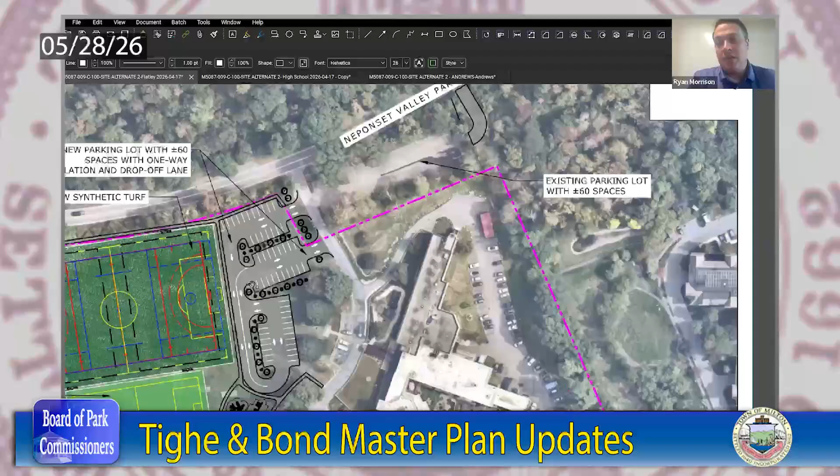How much parking have you added to this? Is that a total of spaces? 58 spaces. So you have 60 over here plus 58 here, which should be more than enough parking for this facility.

Is there like guidelines? I know parking's an issue with the current parking lot, but I'm curious what you go by - is this the right size parking for this facility? Could you speak to that a little?

Yeah, we typically say 20 to 30 parking spaces per amenity. So like each field, say there's 10 kids on each side of the team, so 20 kids playing on a field, and you've got all the parents that want to come out. Sometimes parents carpool together, sometimes they won't, and some parents can't attend. So we typically say 20 to 30 per field or amenity. Here, I'd count each field as an amenity - 3 amenities, plus 1 for the playground. So 120 spaces would be required, and if you have 60 plus 58, you're kind of right in that sweet spot.

Does that make sense? My last question would be, do you know what soccer uses today on Flatley compared to this new plan - field wise? Yeah, like it almost seems like a reduction in what they currently have. It is, if you look at it at surface level, in terms of field space.

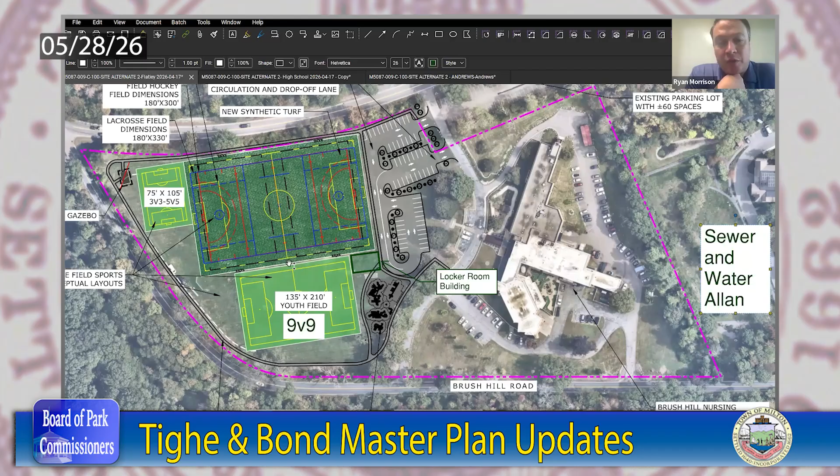I think I do like the mix of grass and turf here because we basically have to fence the turf, right? You have to do that, and if we were to fence this whole park, I really worry about access. So I like the fact that it balances out. And it's nice if there's a playground there, there's some passive use, there's at least some.

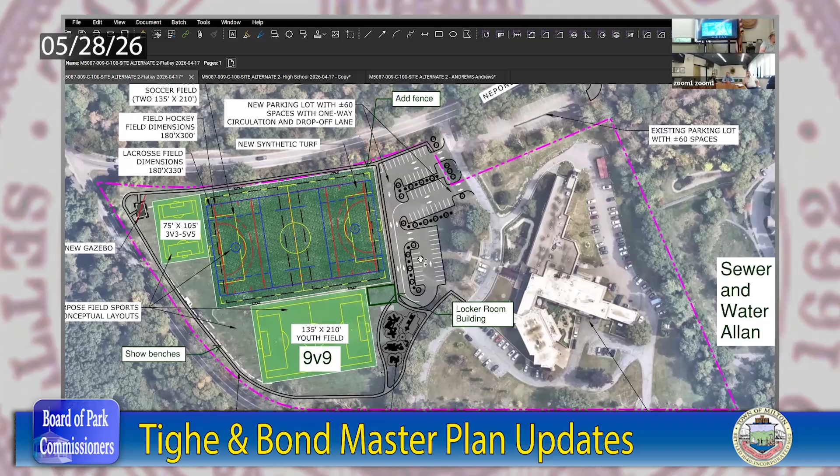This reminds me of Kincaid Field, it's pretty much a duplicate of that, I think I mentioned it once before, in Quincy, where you've got one big turf field. But then you also have really nice greenery around with a nice walking path. I think it kind of does both, this one.

Do you think from soccer's standpoint that this helps them? I don't know, that's why I asked - I'd have to ask my wife. I know they also had planning, right? And I worry about whether it's enough fields.

But to Ryan's point, you can divide that big one up. My thought was that you basically get 4 fields out of this, or the large one. So I think at the end of the day it does help, because it's not just - based on my conversation with Jamie, I would say yes, this does help soccer.

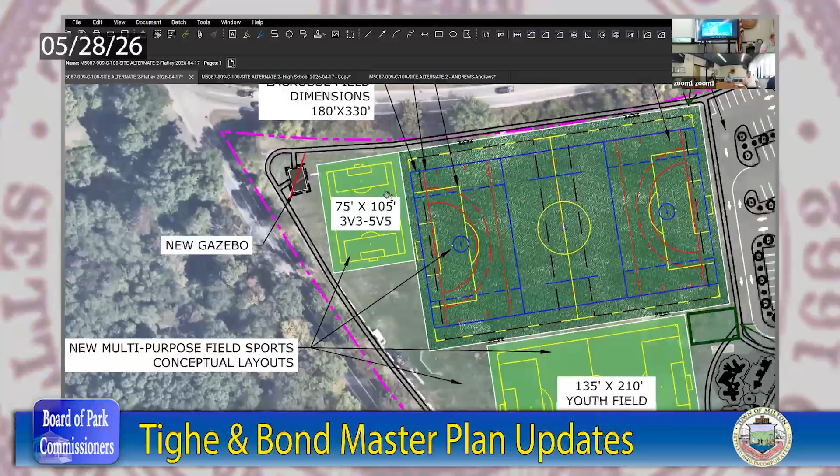Is it everything soccer wanted? Probably not, but it's certainly a big step in the right way. I guess my only other question would be where that small field is, all the way to the left - how much of a need is there for that size field?

Could that be a pickleball court or something? There's another group that's kind of supporting this project. That would be my only other question - is there a way to, and that would probably be a good area for it potentially, because there's not a lot of houses over there.

Ryan, the 3 versus 3 or the 5v5 seems like it could go almost anywhere in town - you could put it somewhere else. So is it possible you just add pickleball to it?

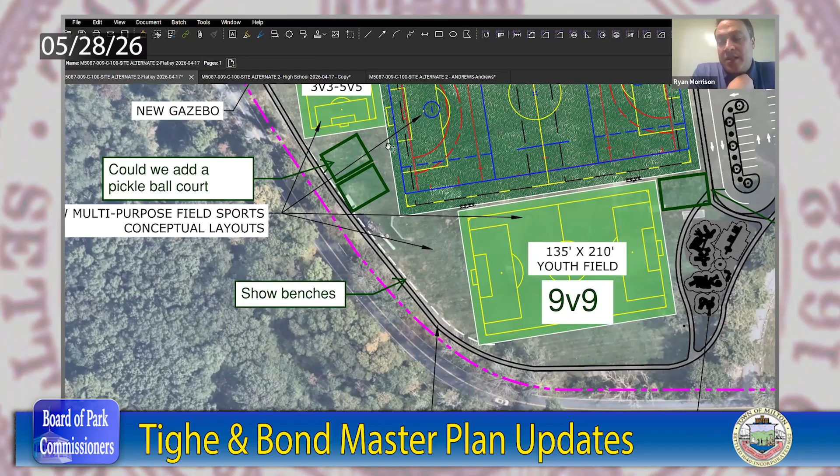The hard part is - that's what I'd like to try. And the reason I'd like to try that is one of the things that both the soccer group and all of the athletic groups have expressed to me is that they're trying to hold events with a limited number of coaches and a really big contingency of players. So whenever they can focus everybody to one spot, it's easier for the coaches to serve multiple uses.

And so if I take that 5v5 field and shift it across town, I'm hurting their ability to congregate in one area. I think to them that's a really big selling point, that they have everybody in the same spot. Now that being said, there is space that's not being fully utilized here.

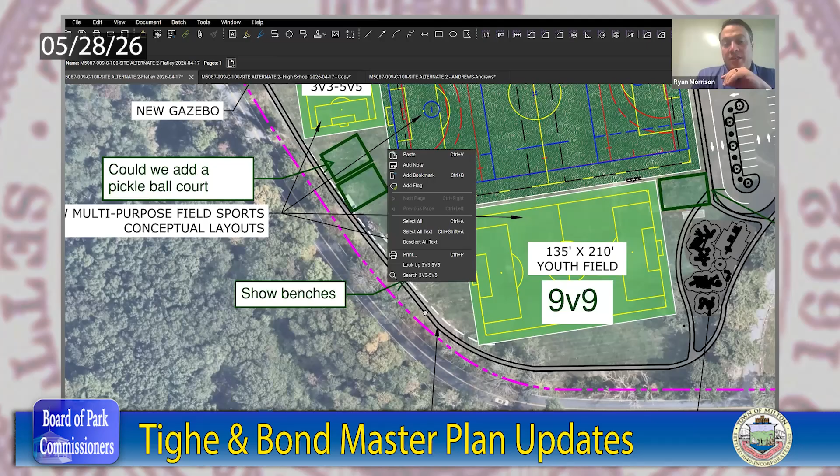To your point, I think it's important to get as many user groups in on a project as possible. So if we could fit pickleball either in this space or in this space, I'm not sure which one fits better at the moment, we'll play with that. But if we could add pickleball to it, that's another contingency, you're getting more bang for the buck. You're not gonna get foot traffic there.

Yeah, most will have to drive there. I look at Kelly Field, the high school, and it's like baseball games going on, softball games going on, lots of stuff. Kids are playing basketball that are there with their siblings.

I think that physical location helps, right? There's a lot of foot traffic that happens there, that's not just mom and dad bringing you to that site. That's what was nice, like Kincaid has, they're not full court basketball or anything, it's like a half court, I'm just trying to find a way to get more.

More people, I think your pickleball idea is a good idea. I was just more responding to the idea of moving the 3v3 versus 5v5. If it's important enough to soccer to have it, I think we would be foolish to try to take square footage from another open space to accommodate a small field.

If it's that important to have it, and you have a space here, I would like to see it stay here as opposed to trying to take away from other space elsewhere in town.

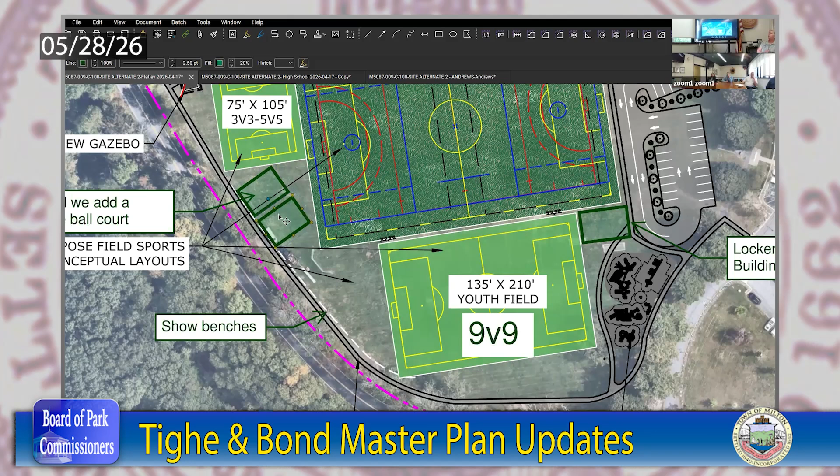The GIS doesn't show it, so we'll probably have to contact DPW about the water. I just pulled it up and it doesn't show it, so we can handle that.

Parking, the new parking lot is basically an in and out, right? You're coming in and then you go out on the parkway. Correct, yes. And we've added that little leg over here so not everyone's filing out one road.

Oh, I see, so then you can still go down that other road to Brush Hill if you want. Okay, yeah, cause that was the only thing I was thinking, with the pickleball courts.

If that all were to happen and the pickleball courts are on like the furthest side of the parking, could you somehow create a smaller lot? Kind of in that triangle grass space, and maybe take away some parking on the other side.

Well, the other thing here is the playground, do we need that big of a playground here? I guess I wonder, it's serving a purpose, but...

I think it's good to have. Yeah, I think it's great, the playground is great. I would leave the playground the size it is, and when we do start to raise money or get an opportunity for the project, certainly we can right size it based on budget. But if you budget for the playground you want, I think this covers just about everything you'd want.

It's not really huge anyways. What's the cost of this playground? I think I have this one listed at $600,000. This is a playground we just bid out and are under construction on, and hope to, basically, Pepperell, basically, yeah, Pepperell's about that.

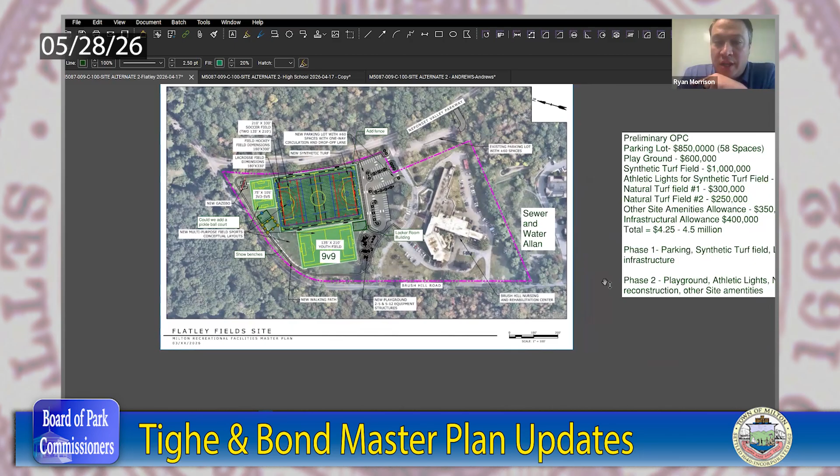Hold on one second, I want to go back to the watering thing. There is irrigation at this site, right? Yes, there is. Okay, I want to add a note here to myself because I left that out of the estimate.

So parking lot, we have estimated about $850,000. The playground's around $600,000. The synthetic turf field, just the field itself, is about $1 million in synthetic turf carpet. The athletic lights for the synthetic turf field we have at about...

Ryan, I don't mean to interrupt, when you say the turf field, just the carpet, so that's no site work or anything? No, my apologies, that wasn't worded very well. I just meant no other amenities associated with the field, like the lights aren't included.

So it's the carpet, the curb, the stone, the under drainage, that's at about $1 million. The athletic lights are about $500,000.

The natural turf field we have listed at about $300,000 to $250,000. I think those are a little overpriced, but I'm covering some drainage in there.

Infrastructure, to be honest, that's kind of about the right price we're going with. We're trying to get a natural field at Andrews for around $300,000, so I think your pricing is pretty accurate.

Yeah, I think you're right there. They're smaller than that field, but I don't think I'm far off, but I think I'm a little high at just about everything.

I just prefer at this stage of the game to be a little high. The little second one might be high. But this shows the area that we own up there.

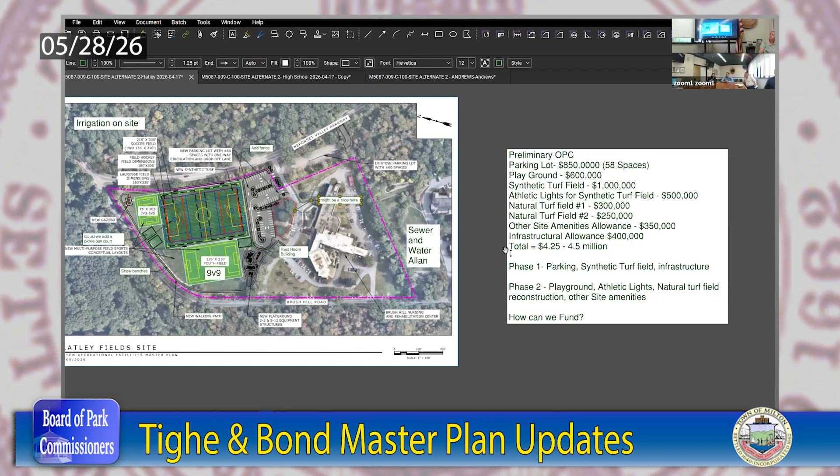Ryan, we made a decision last meeting that we're putting in for CPC money to redo the natural grass field at Andrews. We did make a decision to go ahead on that. Cool, I don't think turfing Andrews is a great option. I figured that to be the case.

Okay, so I guess one last question, maybe you're gonna get to it, is like one other thing. Oops, I like this project a lot. Okay, yeah, okay, so I'll be quiet and let you keep going.

Sorry, next one up is the high school. So the last time we talked about this, we discussed -- sorry, let me delete my notes -- we talked about what are our options at the high school, how could we update this?

The Parks Commission's next conversation was, what if we just synthetic turfed all of Middle Guile to provide as much availability and flexibility as possible? We also updated the high school project to more aptly incorporate the synthetic turf field down at Lower Guile. We've added notes here about the field size, how access to that facility is being provided, and what they're doing for spectator seating. We've pulled that from the plans available on the website.

And what that will help us do is tell the story in that report, like we were talking about, how this is a plus 2 field, and what this would do if it came after Flatley. This facility is a really big synthetic turf field.

For reference, a typical multi-purpose rectangular field inside a track facility is anywhere from 80 to 90,000 square feet. This facility is 185,000 square feet. It's really big, you can play a lot of different things here. We're just showing a little bit of striping to help you understand the sizes here, but it's a full 320-foot baseball field and a full soccer field there.

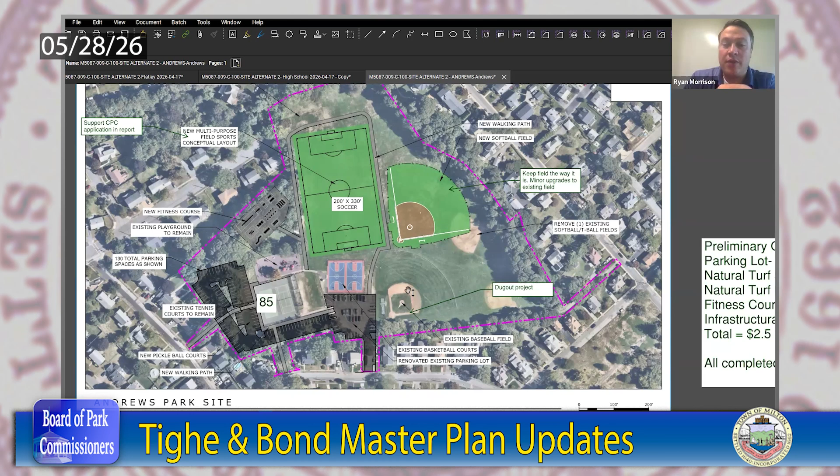Going back to that number we talked about before of having 20 to 30 per facility - if you count hard parks as 4 and this as 5, you'd want somewhere in that 100 to 150 parking spaces. So what's totally shown here is 130.

The difference between this park and Flatley field is that the amount of people who can walk to Flatley versus walk to Andrews is significantly different, given it's surrounded by a community. So to me I see a core number of spaces here, but I worry about how close that parking lot is to all those residents - that's my worry about it.

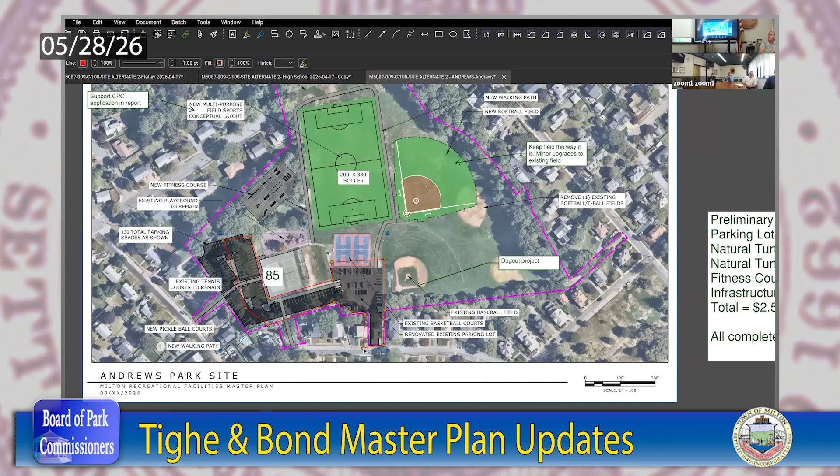Yep. And I know you looked at it - did you look at parking north of the soccer field? We did, and then we decided we didn't like it up there because it was being used for something.

Is there a solution here with less parking that's not so offensive, something like that? Yeah, eliminate that - this is what I wanted to pitch, eliminate one. 85 spaces, guys, so that's almost all the spaces you need, and it just cuts back on being this close to these abutters, gives them some screening buffer. I wouldn't do that.

Yeah, and Kevin, I think Kevin knows this - the reality is for those of us who are down there a lot, if you add parking, what you're ultimately selling to the neighbors is they're either parking on the front lawn or over there, because the reality is they're all over the streets. It's a nightmare.

We currently still have money for Andrew's parking, right? I don't know if that would cover it. You threatened to use it too.

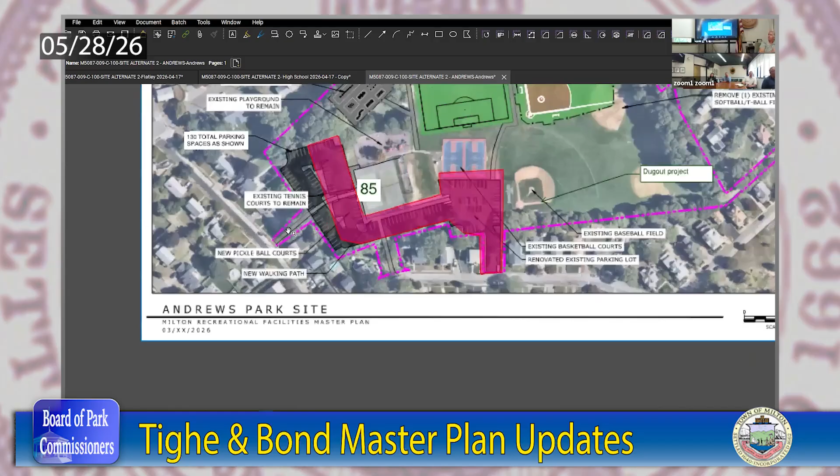There's the paper road in between the two houses, right? Correct. We're not showing that as a road, we're showing that as pedestrian access.

You guys know the community better than I do, but I think it's better to keep it as pedestrian access through there. Is that what you guys looked at, Kevin, making that an entrance, and the neighbors didn't want that?

Yeah, this one is too narrow, but this one would work. Just leave it like that, Ryan, that's perfect, I think.

We'll probably pull this away from the tennis court a little bit, but we'll try to balance providing enough screening. Overall, all we really need is a little bit of buffer between the tennis court. You don't need too much.

We had this total project at 2.5 to 2.7 million. You are already funding this one for 300,000. So what's the other, the parking is what? About $1 million to do the parking.

Sorry, guys. No worries, that's better. So the fitness court too.

I remember the fitness court people came here, I don't know if that was potential funding they were trying to look for. If this is a good spot for it, great, but I don't remember what they thought the cost was. That seems high, but it could be what it is these days, I guess.

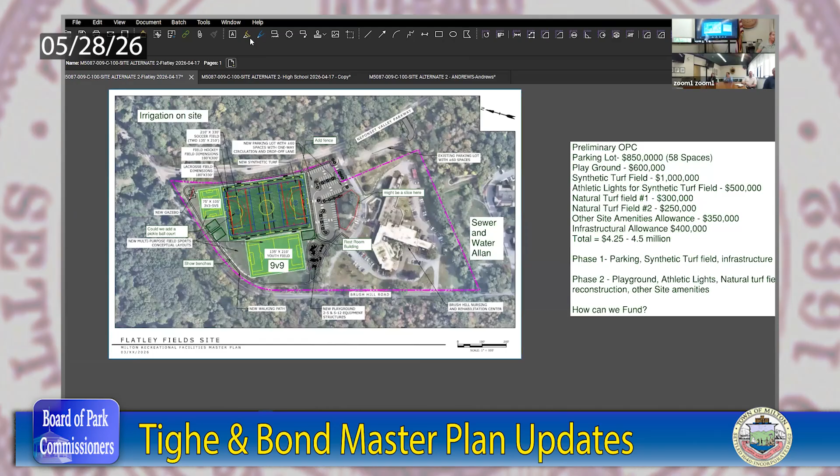By spreading it out, I think you save money on putting in the surfacing, because mulch is probably not going to be accessible, so it needs to be accessible. If you're putting it around the path, you're going to save money on that, since a lot of the money is in the surfacing.

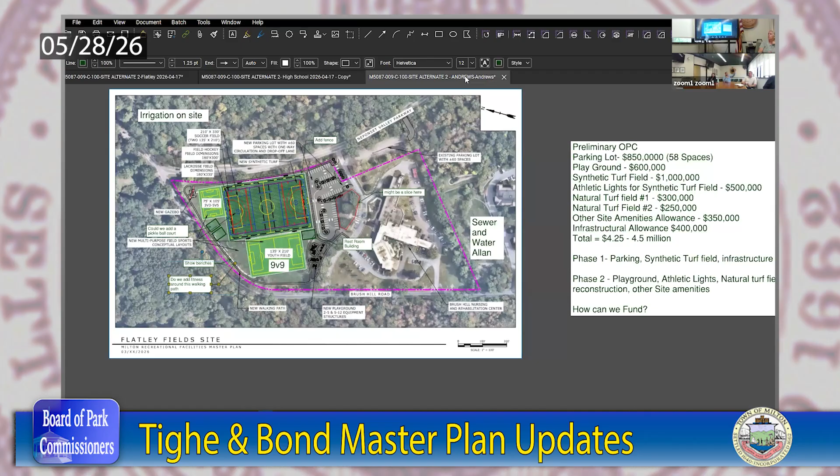So that's what I'm wondering, do we put that here as just an option, Ryan? I think it's still good to put it there too, like in East Milton, have a conversation. We'll show it as optional in both spots, and then let the community come back to us and say.

Okay, and maybe that's an option here too, like in Andrews. Instead of having one court, do we spread it out? That could be two options here to do that as well.

Is there anything about the numbers that scared the town or scared the Parks Commission? I'm just trying to figure out that I don't want to give a report that shows numbers that scare me. I think basically if we were to do all this and bite it off, it's $10 million or something, right? That's what I'm worried about. Is the community going to gasp and say this is crazy?

No, I think the bigger thing here is also to find revenue streams, right? I think it's to put this out there. I like what I hear today because we did the study, it shows a deficit, and we have solutions that you've come up with. I think that's really the important piece of this.

And then the money, we figure out, that's the next piece. What potential revenue streams? We already have the CPC, that's a potential revenue stream. What other state grants and stuff can we find? What other private money can we raise? And then what can residents get behind?